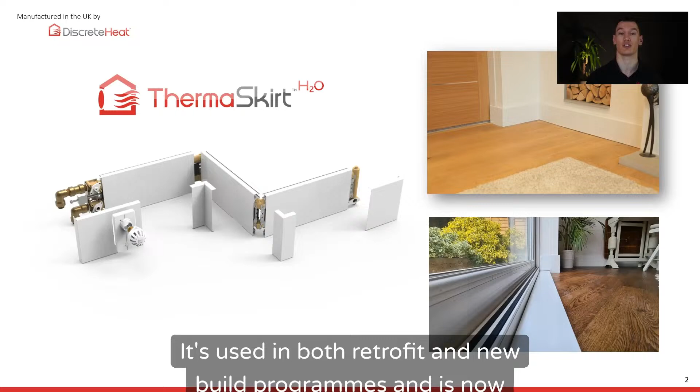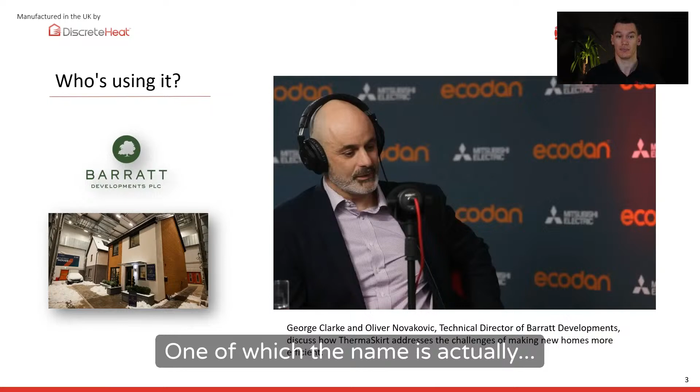So we probably wouldn't be here if we had no idea what ThermaSkirt was, but essentially it's just another heating alternative to underfloor heating and radiators. It's disguised as a skirting board in an aluminium panel, as you can see from the pictures. It's used in both retrofit and new build programs and is now extensively used by a vast amount of developers, one of which is Barratt's, one of the largest UK house builders. I'm going to leave you with the technical director of Barratt's and Channel 4's George Clarke with their thoughts on ThermaSkirt before we get into the nitty gritty.

There's some great stories around the Z House. I mean, obviously we can't physically see it. I wish we were there having a look around it now, but just paint a picture of what it's like in terms of design and innovation.

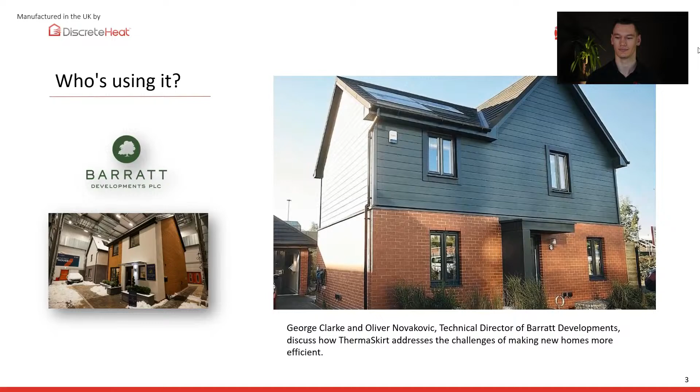I think the most important thing for me was that the Z House looked normal. The Z House is actually called an Alderney. It's one of the houses we build many thousands of. We have 400 sites, so we're selling a lot of these, so we know customers like the house. The second most important thing was that you could be green in this house without having to try, without a change to your lifestyle. So if you were to walk up to the Z House, you wouldn't know that it was a zero carbon home.

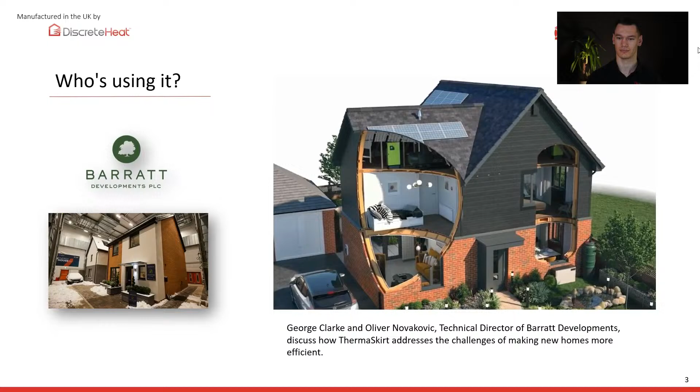And if you walked around it, except for an air source heat pump on the outside, which wouldn't be normal in today's house, and some of the innovative heating systems like infrared and skirting boards that deliver heating, you wouldn't know. You'd just live a normal life, but actually you'd be saving 70% of the energy that you'd usually use. That's quite a lot, isn't it?

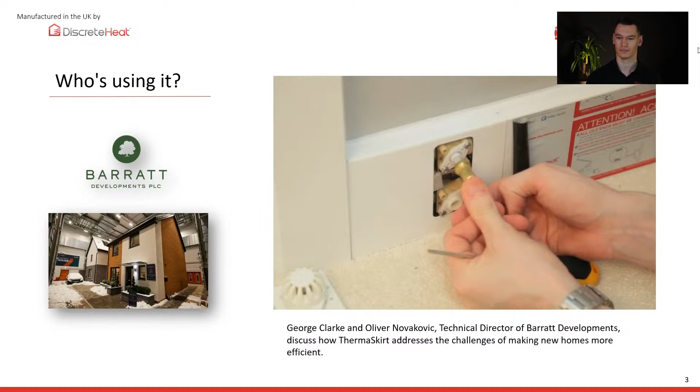So skirting boards deliver heat energy? Yeah. So you'll know with the air source heat pumps, the temperature of the water reduces down to 40, 45 degrees, so you need a lot more surface area. The problem in the houses is surface area delivered by radiators mean they could be quite big, and radiators get in the way of furniture and other things.

So Salford University actually introduced us to this innovation where the hot water goes into the skirting board, so all of your skirting boards are the radiator. So you've got no other radiators in the house? In the Z House I have, because I'm testing. But actually, in some of the other houses we're now trialling, we won't have radiators. We'll either have skirting board heating or underfloor heating. So multifunctional skirting board. Yeah.

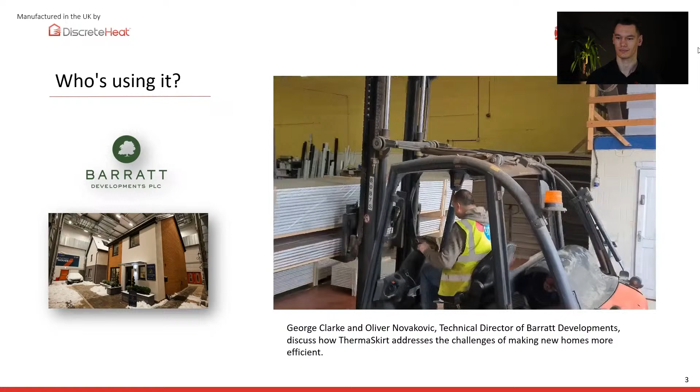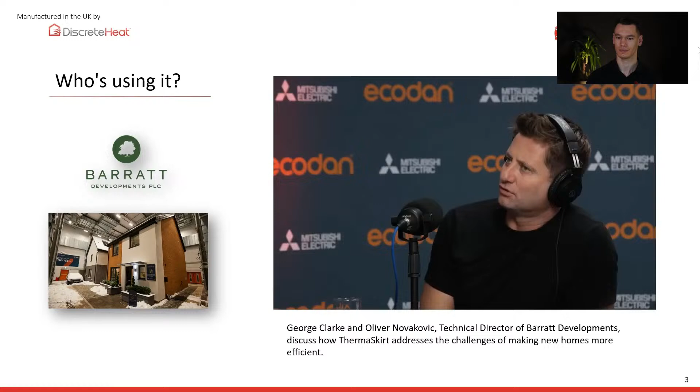Love that. And what's great about it is that you can also put electric down it. So as we move further along the zero carbon agenda, we're going to really concentrate on fabric. So the skirting board's a bit like ductwork for running services. Yeah, so as you know, in offices, we've regularly run electrics down the service. Here, we're running hot water in the skirting board.

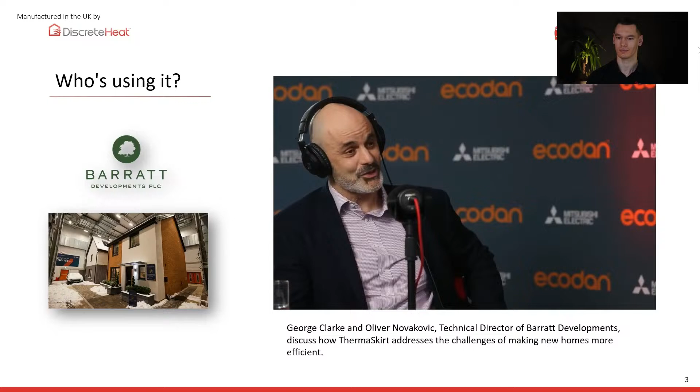There's some great...

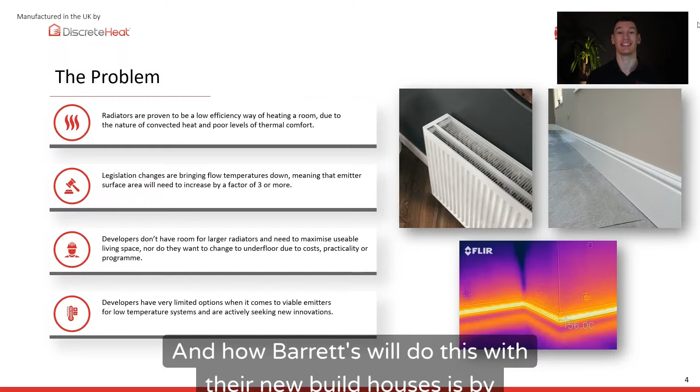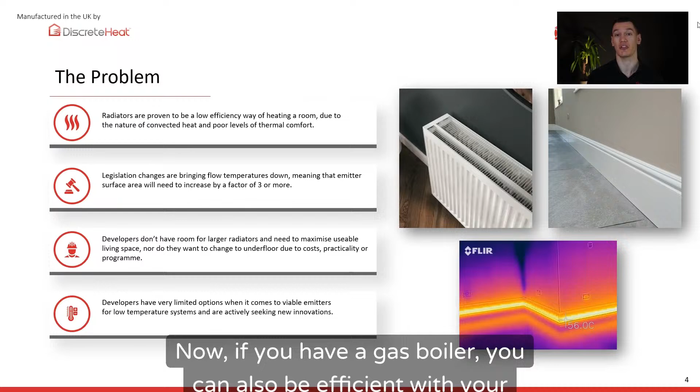As Oliver mentioned, we are going to have to think about how we are going to be more efficient with our heating systems. And how Barratt's will do this with their new build houses is by insulating very well and using heat pumps to power their central heating, running at really low flow temperatures. Now, if you have a gas boiler, you can also be efficient with your heating system too, by reducing the flow temperature around 60, 55 degrees. Obviously you'll increase the efficiency of your boiler.

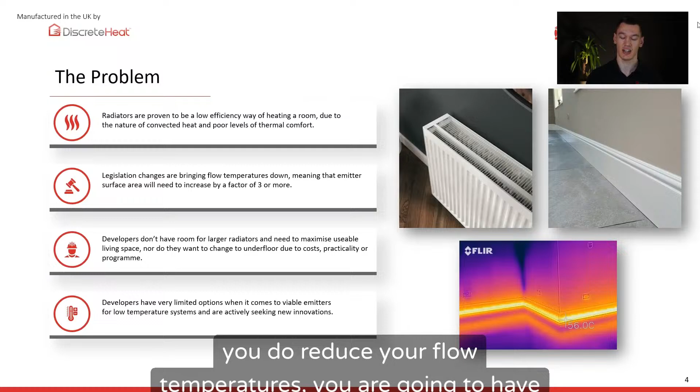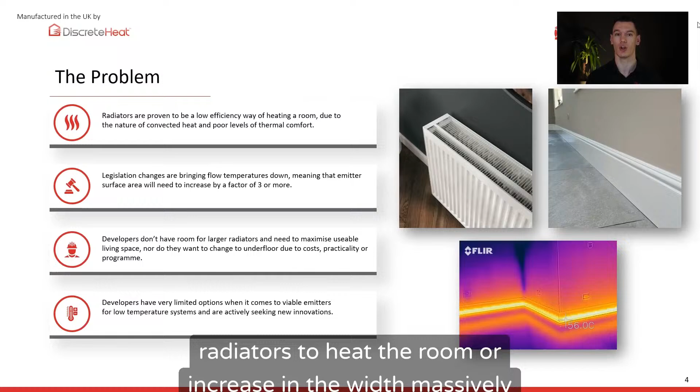However, with what developers are experiencing, if you do reduce your flow temperatures, you are going to have to increase the size of your emitters. So with radiators, you'll be looking at either double or triple panel radiators to heat the room, or increasing the width massively along a wall.

This isn't particularly aesthetically pleasing for developers or one of our 80,000 customers that we have to date, which is why they're looking to use ThermaSkirt more and more, and we're more prominent in the market, as obviously we fit a nice aesthetic heating solution that's efficient and works really well.

Now, to really see the conversion of a radiator to ThermaSkirt, I've got a table here just to show exactly that. So these outputs are at delta T20 or 45 degrees flow, so typically what a heat pump is going to be running at. To the left we've got the double panel radiator size, and to the right we've got the equivalent length of our Deco BM2, our 2-pipe system, and our Deco BM3, which is our 3-pipe.

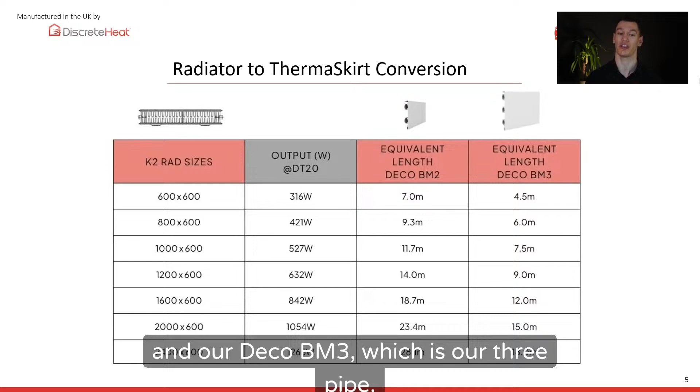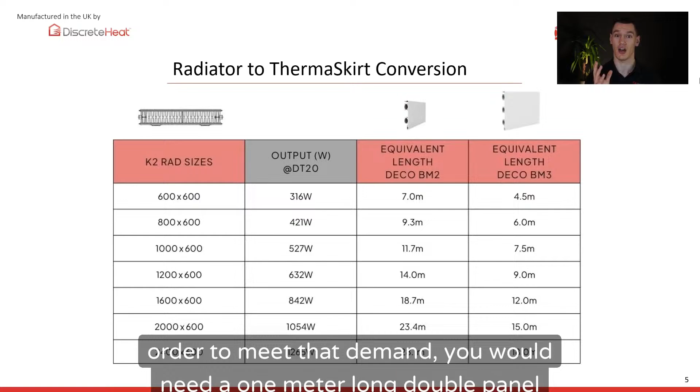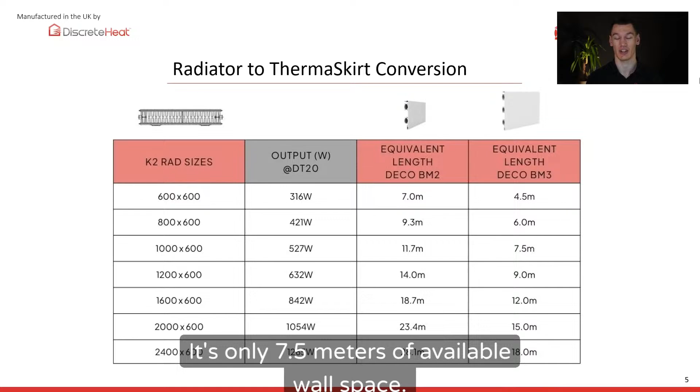So if you had a room that had a heat loss around 500 watts, in order to meet that demand, you would need a 1 meter long double panel radiator to meet those heat loads. Whereas if you were using ThermaSkirt for the 2-pipe system, you'd only need 11.7 metres of available wall space. Whereas with a 3-pipe, obviously it's a little bit bigger, so larger surface area, you need even less - it's only 7.5 metres of available wall space.

So essentially, ThermaSkirt eliminates the aesthetic and practical compromises involved with radiators with the increase in size of the emitters. Now, with boilers, how they're actually rated and tested, they're run at condensing temperature, which is around 50 to 55 degrees. So what our customers have been doing is designing at these flow temperatures and getting ThermaSkirt in order to meet those heat demands.

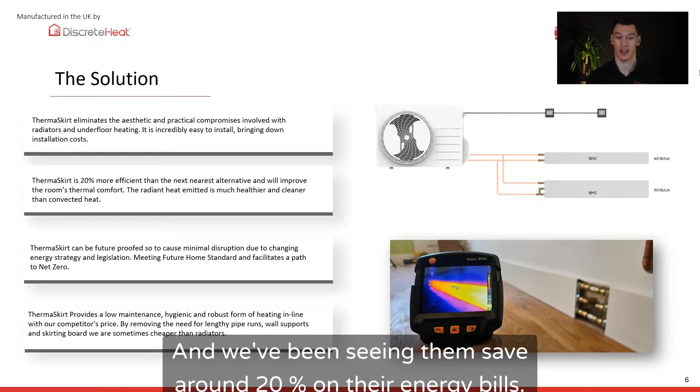And we've been seeing them save around 20% on their energy bills. Hence, it's going to be 20% more efficient than the radiator systems that they already have.

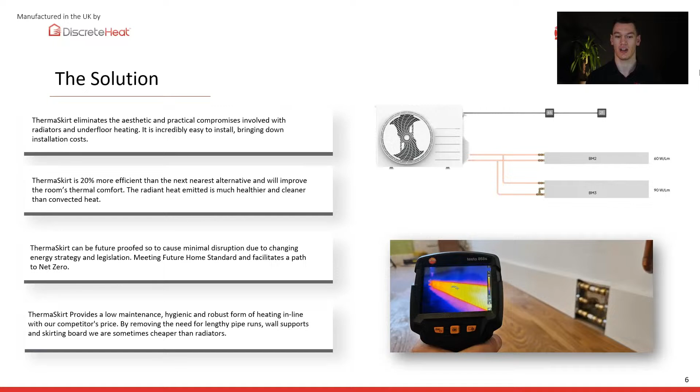So some customers have been taking it one step further and getting heat pump ready, future-proofing their property. They do this by removing the radiators, designing at really low flow temperatures such as 45 degrees. So when it does come to swap out their boiler, it's all ready to go. They've got their heating emitters ready for the heat pump, get rid of the boiler, put the heat pump in. This minimises the amount of disruption and makes it more practical for a low flow heating solution.

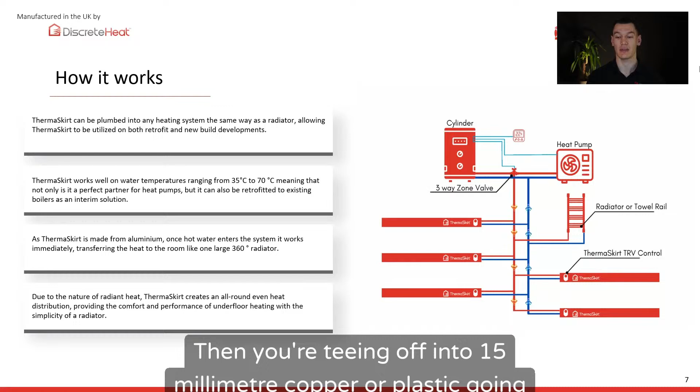So I've got a diagram here of how ThermaSkirt actually works. We've got a central heating system powered by a heat pump, and you've got your main flow and return going throughout the house. Then you're teeing off into 15mm copper or plastic going into the ThermaSkirt. This is where the water energy transfers into the ThermaSkirt and that radiates into the room.

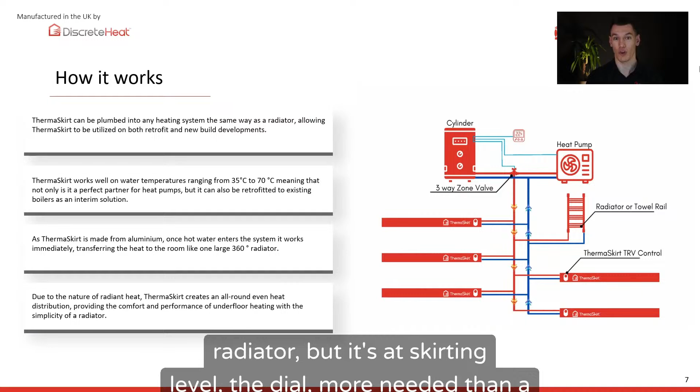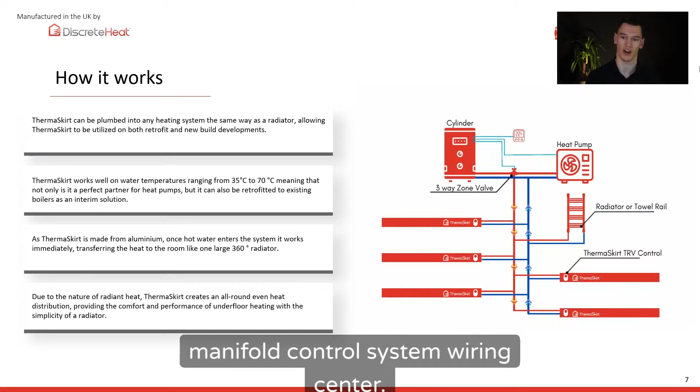The ThermaSkirt is either controlled by a manual TRV, similar to a radiator, but at skirting level, more neat than a radiator TRV. You turn it 1 to 5, very simple. Or you can go more the underfloor heating side with a manifold control system wiring centre. So you've got that flexibility there.

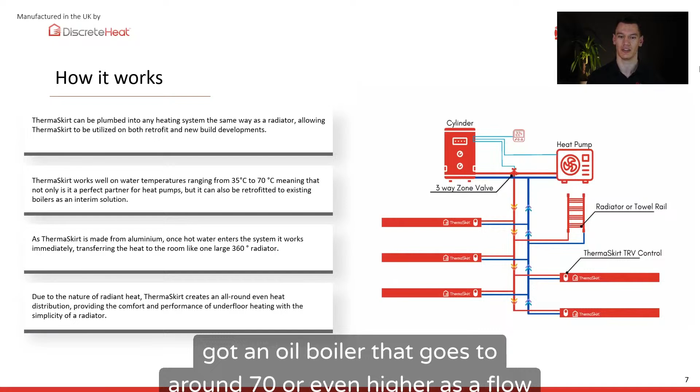Not only have you got flexibility with controls, but flexibility of the flow temperature as well. It goes all the way from 35 degrees to 70 degrees with ThermaSkirt. So it's the perfect interim solution whether you're getting a heat pump possibly in the future and want to keep your gas boiler, or if you've got an oil boiler that goes to around 70 or even higher as a flow temperature.

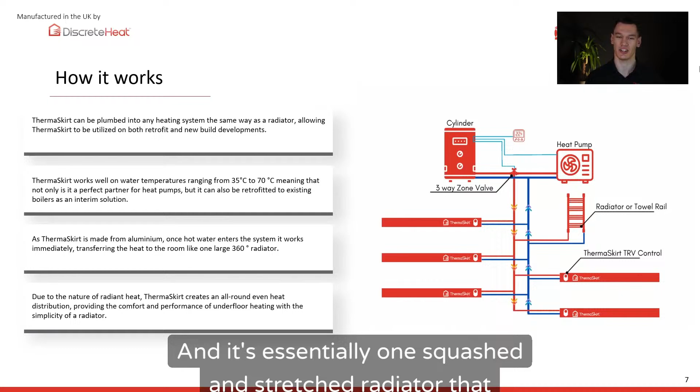The reason why ThermaSkirt is more efficient is because it's made of aluminium, which has a very good emissivity of heat. It's essentially one squashed and stretched radiator that distributes heat evenly all around the room rather than just a single point. So you get all the simplicity of the install of a radiator, where you just use two 15mm pipes, but you get the distribution of heat similar to underfloor heating where it's all around the room.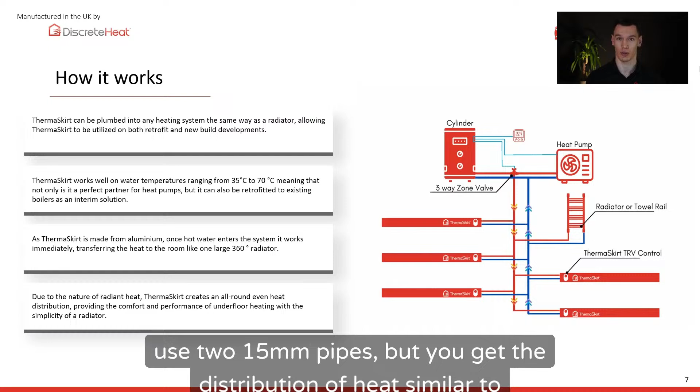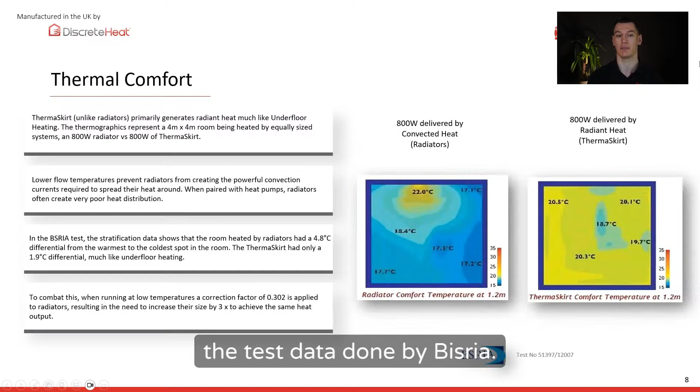So what shows this really well, this particular thermal comfort, is the test data done by BSRIA. They tested 2 rooms, 4 by 4 metres, as you can see here. To the left, you've got 800 watts of convected heat delivered by radiators. And to the right, you've got 800 watts of radiant heat delivered by ThermaSkirt.

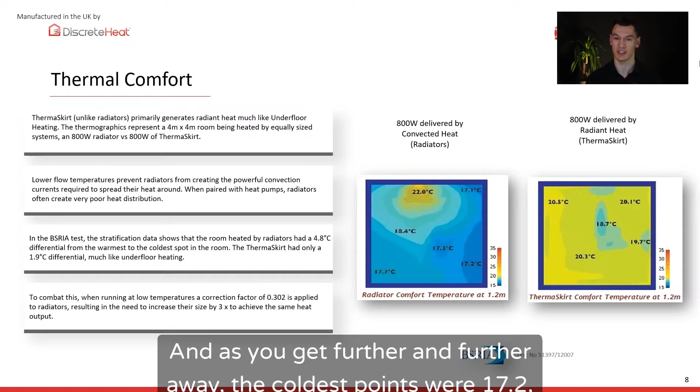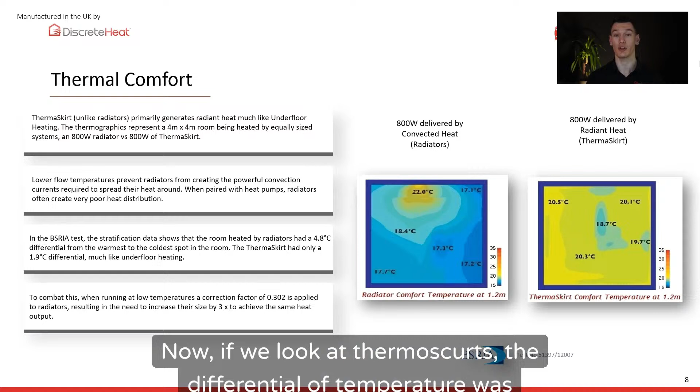As you can see, the hottest point by the radiator itself is around 22 degrees, and as you get further away, the coldest points were 17.2, 17.1 degrees, which is quite substantial within a room that small - that's 4.8 degrees from one side to the other. Now if we look at ThermaSkirt, the temperature differential was significantly better and hence more comfortable, with only a differential of 1.9 degrees - very similar to underfloor heating.

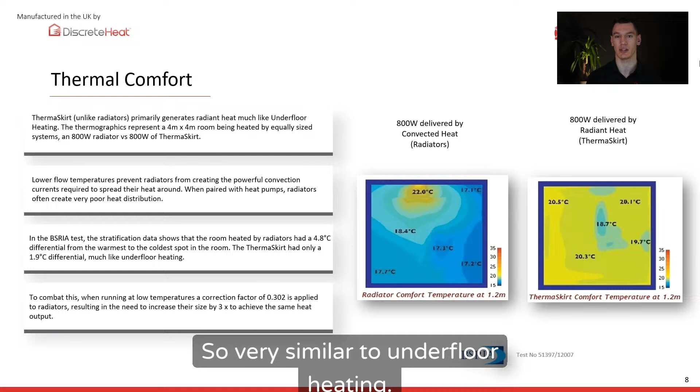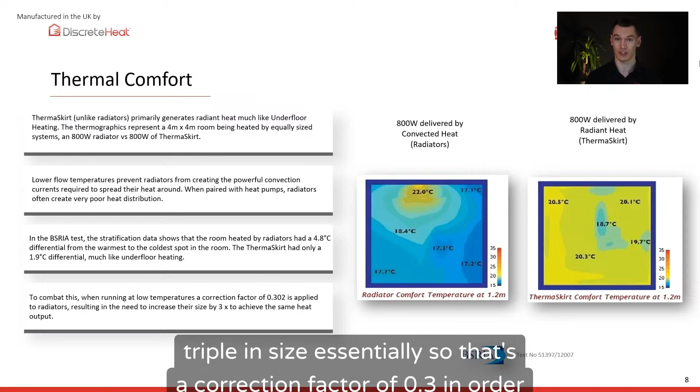So with radiators, in order to adapt for this lower flow temperature, they have to triple it in size essentially, so that's a correction factor of 0.3 in order to achieve the same heating as you see from the diagram. So what BSRIA found is obviously it's significantly more comfortable using ThermaSkirt, but we were also 13% more efficient with the heating.

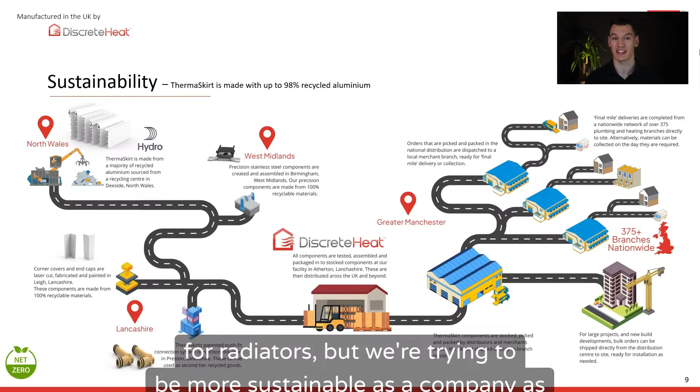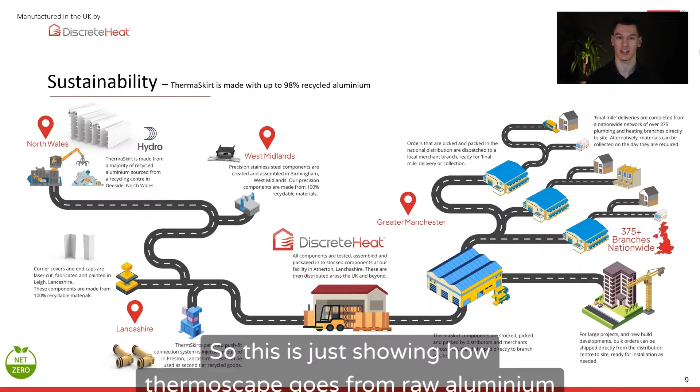So not only are we more efficient compared to radiators, but we're trying to be more sustainable as a company as well. So this is just showing how ThermaSkirt goes from raw aluminium all the way into someone's home as a heating system.

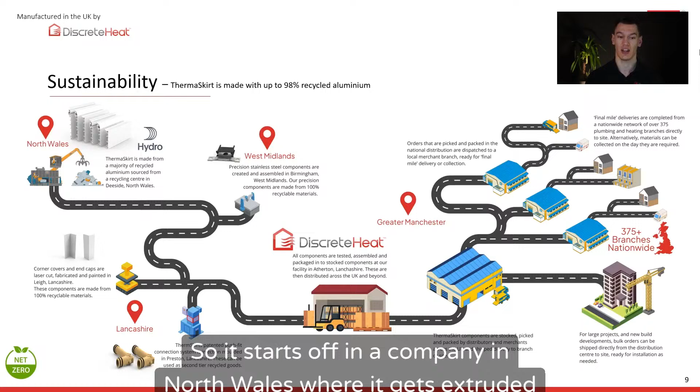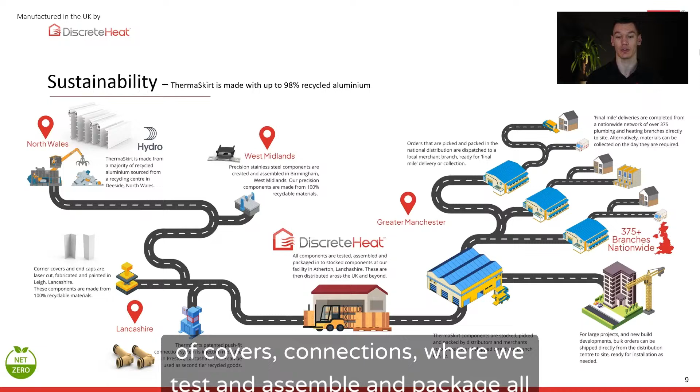It starts off at a company in North Wales where it gets extruded and sent to us here in Atherton. We get other components from the West Midlands, Lancashire - all sorts of covers, connections - where we test and assemble and package, all ready to send over to distribution, such as City Plumbing, who then send it on to their smaller branches to the homeowner, or directly to larger projects, like a large apartment or new build projects.

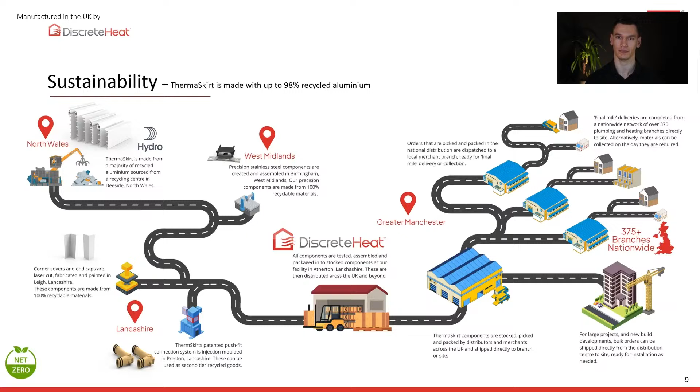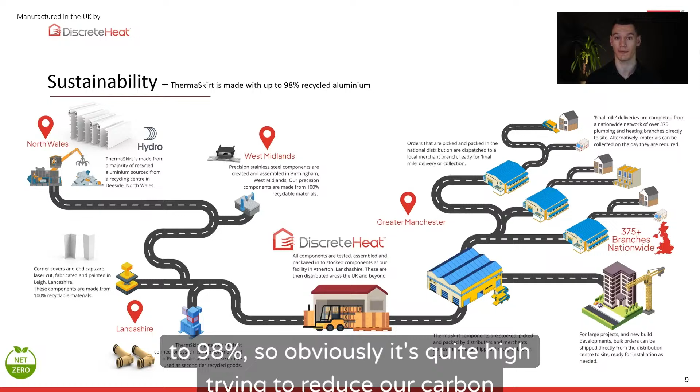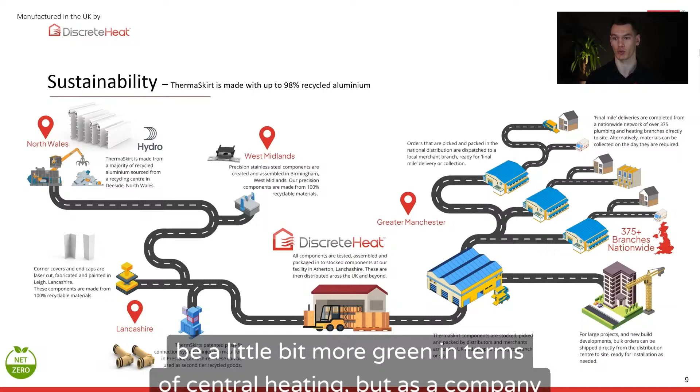With our sustainability, the recycled aluminium that we use is up to 98%, so obviously it's quite high, trying to reduce our carbon footprint. And all parts that we manufacture are 100% within the UK. So we're really trying to not only reduce everyone's heating bills and be a little bit more green in terms of central heating, but as a company as well, reducing our carbon footprint.

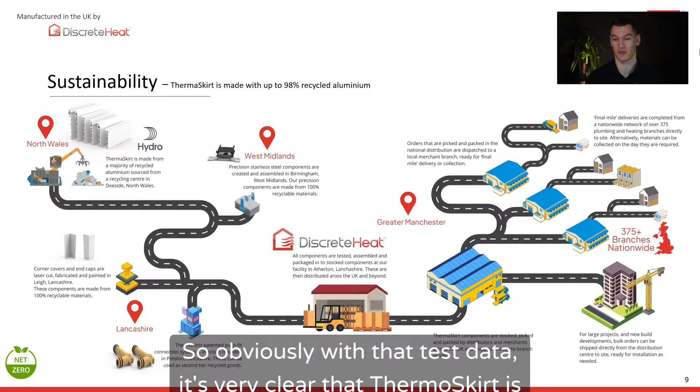With that test data, it's very clear that ThermaSkirt is very efficient, it's better than a radiator. We're trying to be more efficient as a company. Does the product actually work?

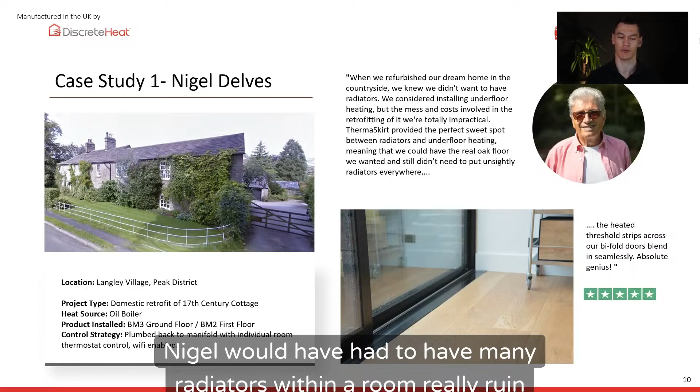I've got a case study here, a real life one from a gentleman named Nigel Delves. This is his particular property, a 17th century cottage, so quite old, quite high heat loss, with lots of glazed areas. Essentially, Nigel would have had to have many radiators within a room, really ruining the aesthetics of what he was trying to go for.

Retrofitting underfloor heating would have been an absolute nightmare and cost a fortune as well. So he found us, and that's where he was very impressed. Obviously, we were the best of both worlds - we got all the ease of install with the feeling of underfloor.

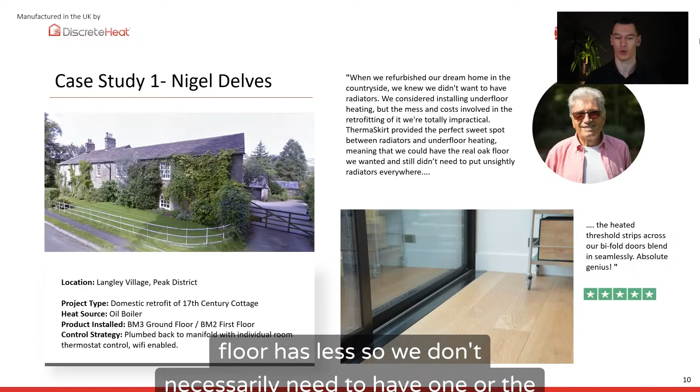Nigel had the BM3, so the 3-pipe for the ground floor and the 2-pipe for the first floor. The reason we use the 2-pipe or the mix is because the ground floor usually has higher heat losses, whereas the first floor has less. So you don't necessarily need to have one or the other throughout the house.

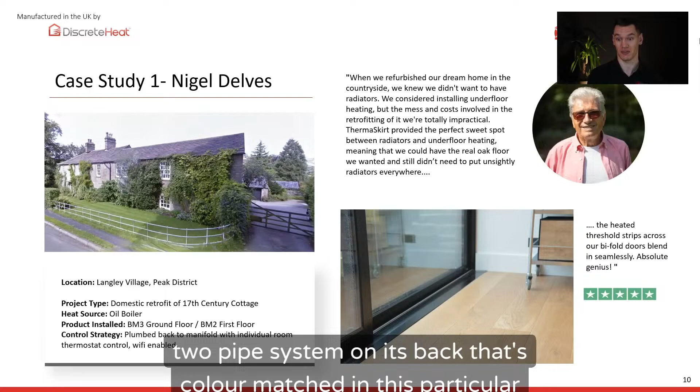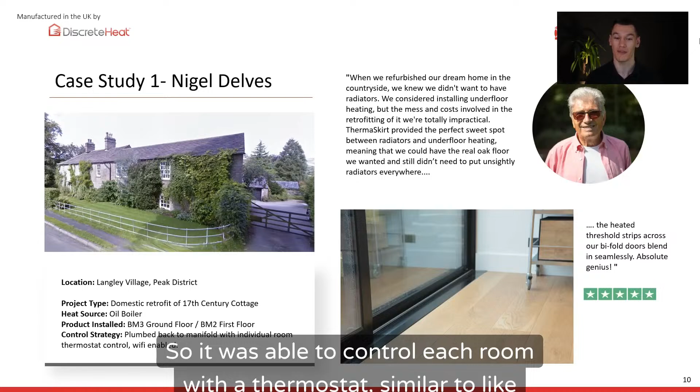One great example of why Nigel went for us, as you can see from the picture, is our heated threshold, essentially our 2-pipe system on its back that's colour matched, in this particular instance, to black. All these zones were plumbed back to a manifold with individual room thermostat control, Wi-Fi enabled, able to control each room with a thermostat, similar to an underfloor heating system.

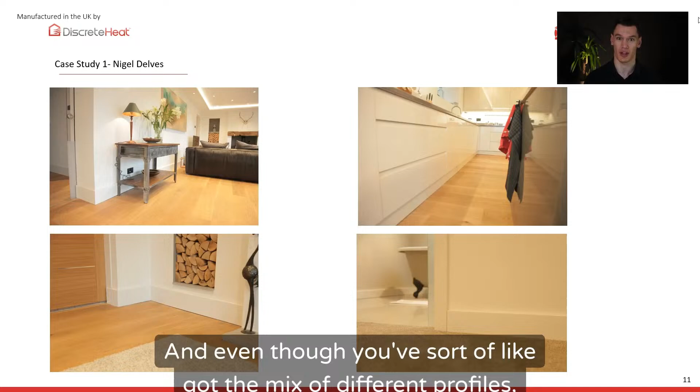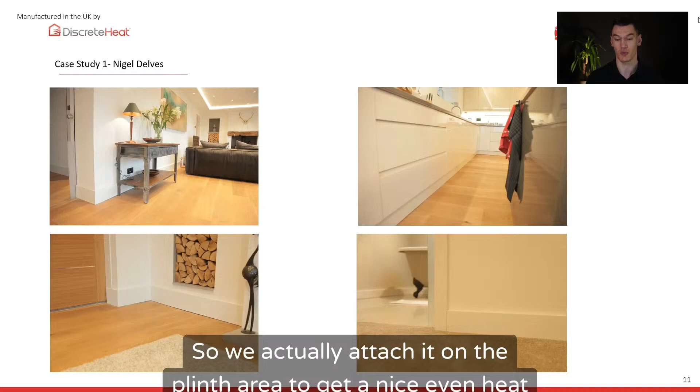Here are some great examples of the 3-pipe on the wall to the left, and the 2-pipe to the right. You've got the bathroom area at the bottom right, and it looks very aesthetically pleasing. Even though you've got the mix of different profiles, you can't really tell. Now to the top right is actually our 2-pipe system on kitchen plinths - we attach it on the plinth area to get a nice even heat distribution all around the room to keep you comfortable throughout.

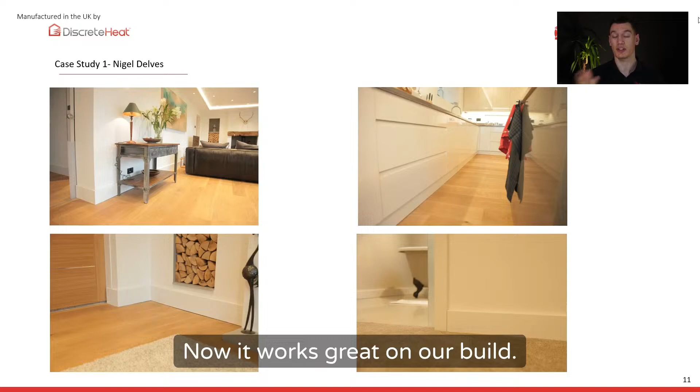Now it works great on an old build - this particular one was on a boiler. Now how does it work on new build projects with lower flow temperatures?

This is what we've done with Kingswood, our second case study for this webinar. Joel Winders is the commercial director of Kingswood Homes. He was having an extension done and found our product, was very interested in using it, got it installed, and was so impressed that he wanted to use ThermaSkirt for his projects within Kingswood, proposing it to his other colleagues.

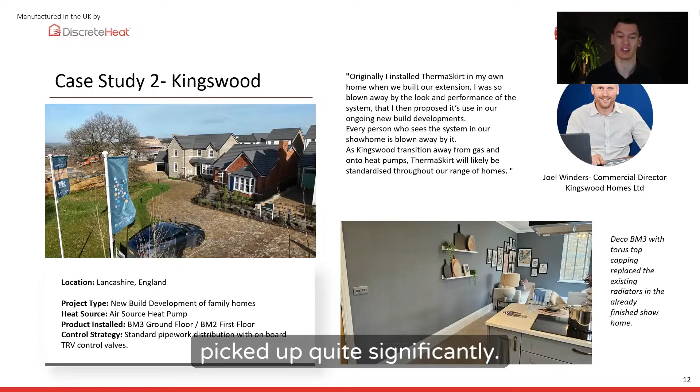They're doing it this year, and it's been very positive - customers have wanted to use ThermaSkirt as an option, and it's picked up quite significantly. We've designed this to have the 3-pipe on the ground floor, the 2-pipe for the first floor, similar to Nigel. We've got the torus capping profile rather than the square edge to match their current skirting, giving it a more traditional, aesthetically pleasing style. And we've met the heat loads for an air source heat pump, designed at 45 degrees flow.

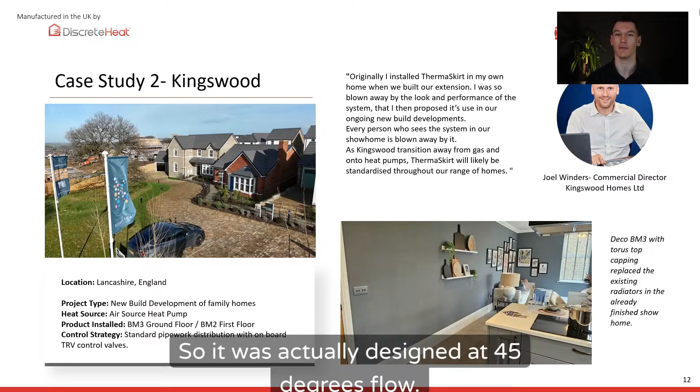Here are just a few examples. It's powered by the manual TRV, similar to a radiator - you turn it 1 to 5.

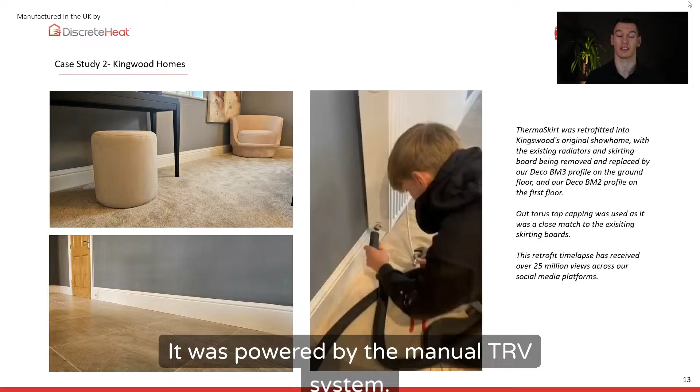I'm going to leave you with a very popular video, with 25 million views across our social media platforms, of how we actually install ThermaSkirt by removing one of their radiators.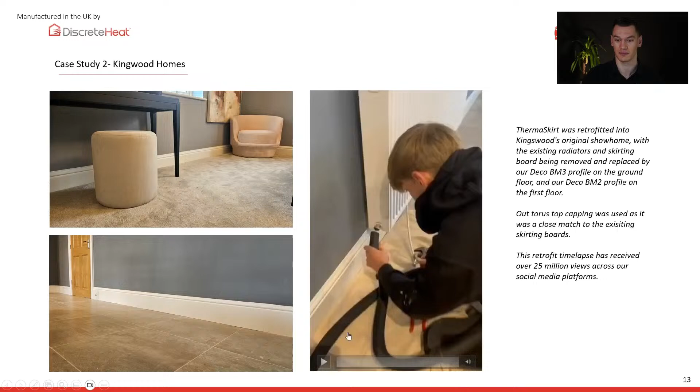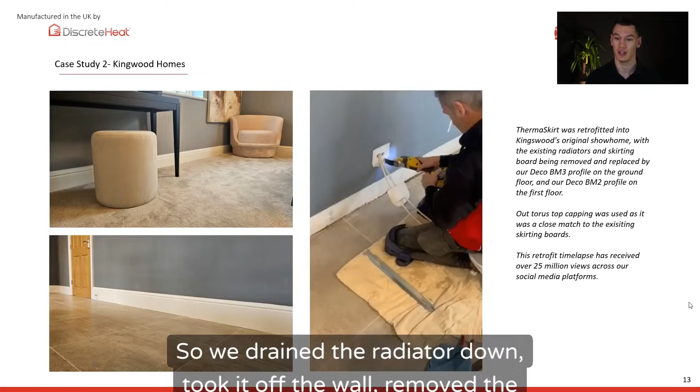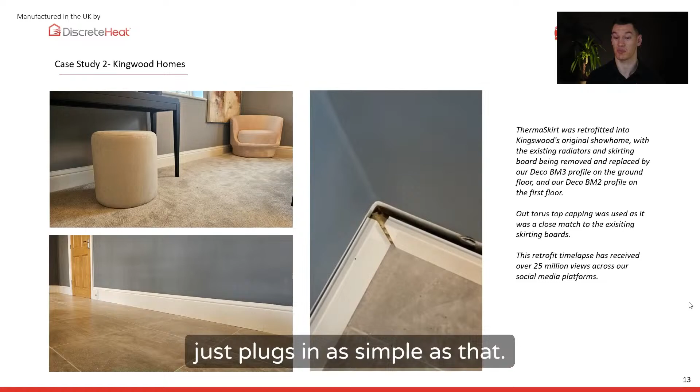This really goes to show how simple ThermaSkirt actually is to install. We drained the radiator down, took it off the wall, removed the skirting boards, and prepared the pipe work for ThermaSkirt. We put it all together, prepared it, put the brackets on. The pipe work just plugs in, simple as that. Covers just click into place.

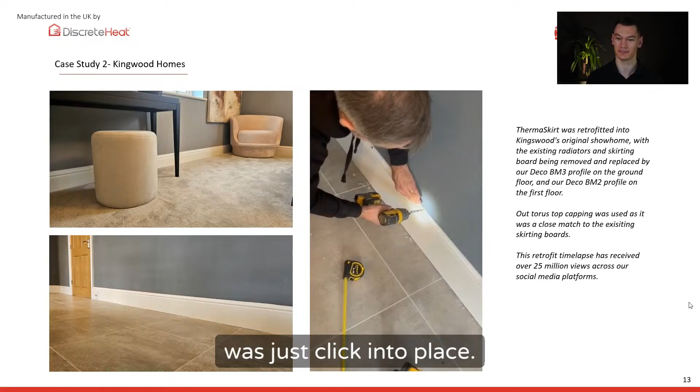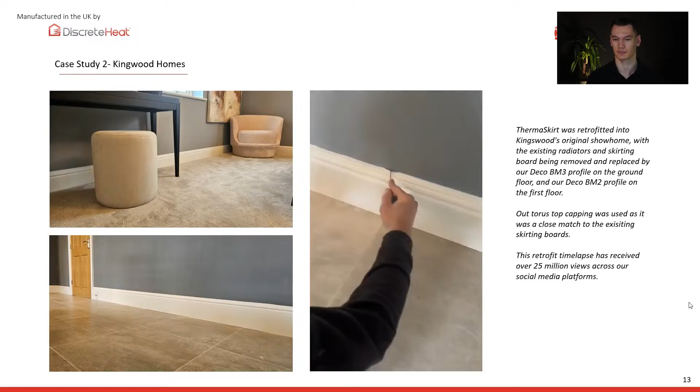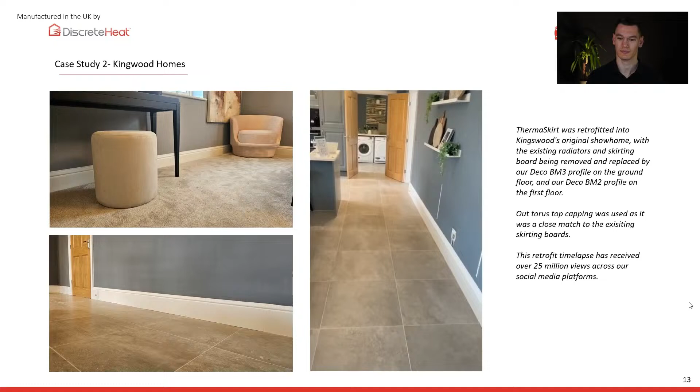And that's it. So dead simple, we've saved a lot of space there and obviously improved the thermal efficiency of that particular room. Great example, Kingswood, if you do know them and you want to pop by, feel free to pop into their showrooms if you are interested. Great video that shows how easy ThermaSkirt is to install.

Obviously the products and the company speak for themselves. We've got great reviews, a very efficient heating system. Now what it will come down to is cost at the end of the day. Will it cost an arm and a leg? Are you going to have to remortgage the house to have this amazing heating system?

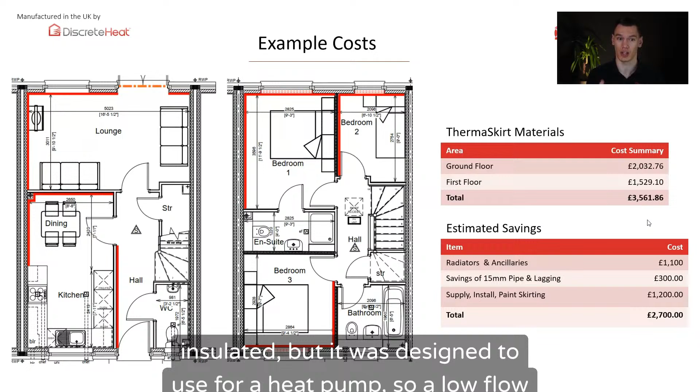This slide just shows you some example costing. This particular project was a new build, so it was quite well insulated, but it was designed to use a heat pump at a low flow temperature. So we've got red lines where we've got the heated skirting, and as you might notice straight away, we're not actually on every single wall. Typically with ThermaSkirt, you're only usually on 50 to 75% of the walls with heated skirting. Then you can either use our dummy MDF to match, or provide your own matching skirting if you've got a similar skirting profile.

So for the cost of this particular house, for materials only, we have the ground floor area at £2,032.76 for ThermaSkirt, and then the first floor was £1,529.10, bringing a total of £3,561.86 for the whole house.

Now the savings we're making for this particular customer - they were comparing against sort of bog standard radiators, nothing special. So the radiators and ancillaries, they were looking at around £1,100. The savings on 15mm pipe and lagging, as you don't have to get to the extremities of the room with ThermaSkirt, so we're making savings there - that was £300. And the supply, install and painting of skirting, that was looking at around £1,200. So we've got a total here that we're saving around £2,700 for the customer.

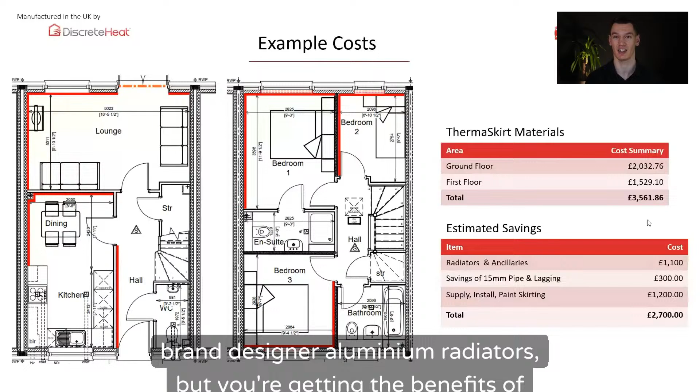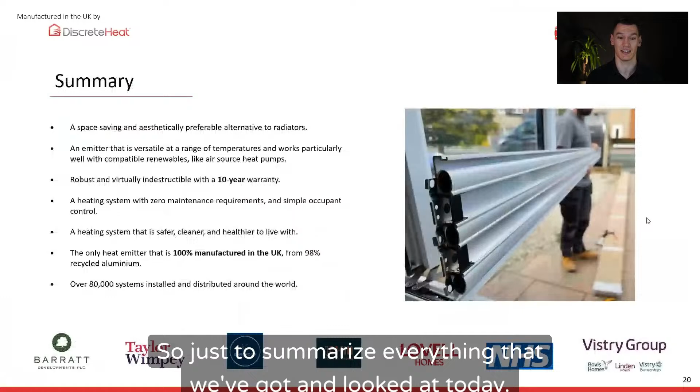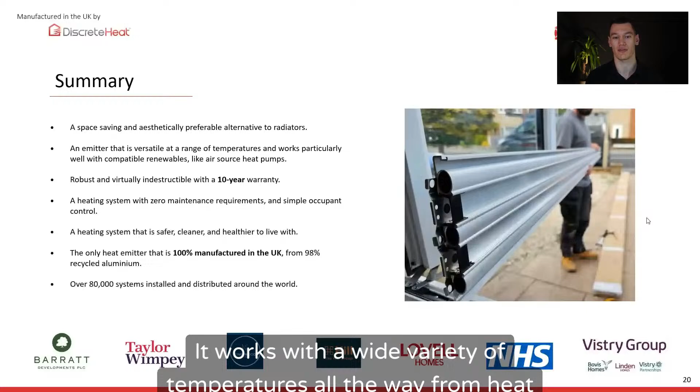So just to summarise everything we've looked at today - I'm sure we can all agree ThermaSkirt is a space-saving and aesthetically preferable alternative to radiators. It works with a wide variety of temperatures, all the way from heat pump, sort of 35, 45 flow, all the way up to oil boilers, so 70 plus. It comes with a 10-year warranty and is very robust. It's been tested with the NHS with a robust product test, so have a look online, there's a video with that.

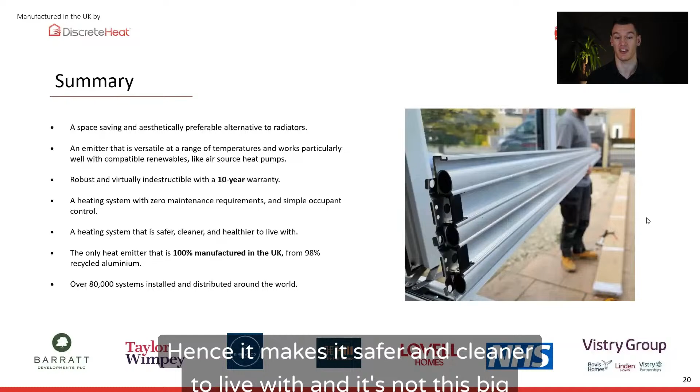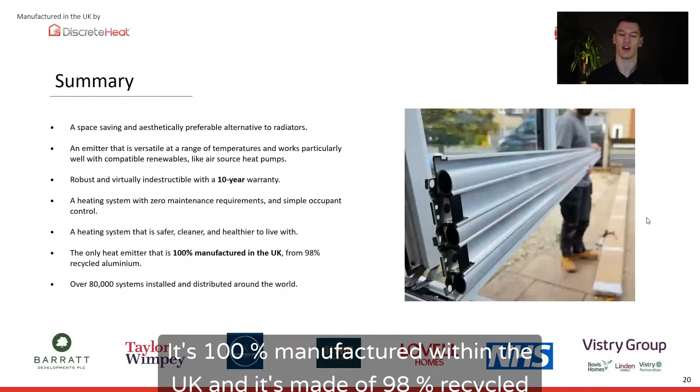So there's no maintenance requirements for ThermaSkirt as there is with radiators, so there's no air that builds up after commission, and there's no sludge as well, as it's made of aluminium. Hence it makes it safer and cleaner to live with, and it's not this big metal box on your wall that you can trip on. It's 100% manufactured within the UK, and it's made of 98% recycled aluminium. We've done over 80,000 systems to date, have over 15 years of experience, we've seen it all over the years.